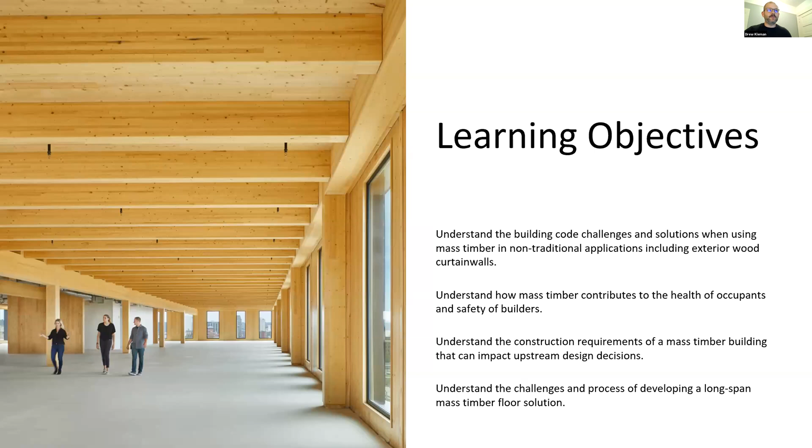So we split the presentation into 3 categories about the Catalyst project, hitting on design, construction, and product. Again, keying back to those learning objectives, learning about the mass timber project, and I think setting the stage for design is important here on this project, but also getting that feedback from the construction team, and then some insight into a company in developing a product through innovative mass timber solutions. So I think the important thing here is the perspective that we as an integrated team can bring here.

So for the design portion of the presentation, I'm going to briefly discuss the project goals and some metrics just to kind of give a frame of reference to the project. So early on, there were some key goals that drove the project's design and execution. These goals were highly embraced by the client and the design team. So first and foremost, utilizing mass timber to support offsite manufacturing and fabrication. And this really helped lead us to innovative uses of mass timber, which we'll discuss later in the presentation. One of those innovations is the long span mass timber floor solution that Hans Erik will be talking about.

That innovation precludes the need for concrete in order to get a long span solution in mass timber, the first of our knowledge of that type in North America. The net zero energy and net zero carbon target goals also led to innovative uses of mass timber solutions, specifically with the exterior wall assembly.

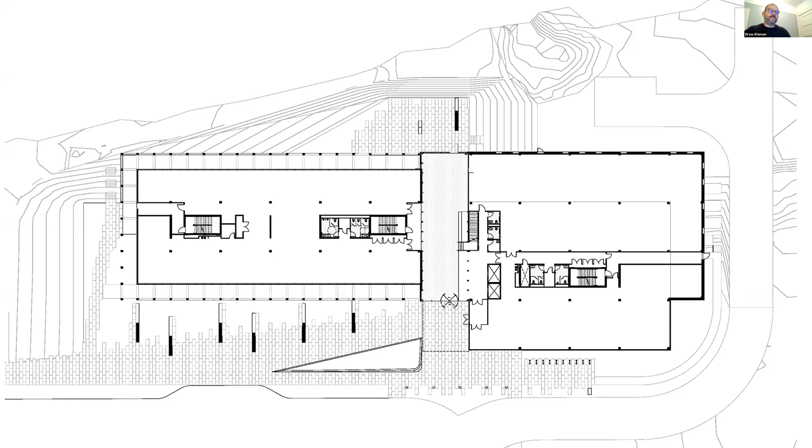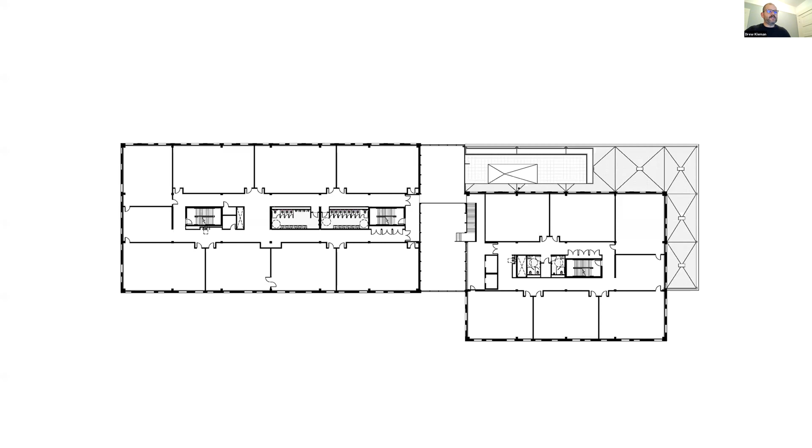The upper floors are more reflective of the rigor within the structural system and the program organization. So here the second floor is partially carved out to provide a two-story lobby. The building is organized on a 30 by 30 mass timber grid, like I had said previously. This breaks down into 10-foot by 30-foot nominal sections, which then inform the overall CLT floor components, as well as the wall modules.

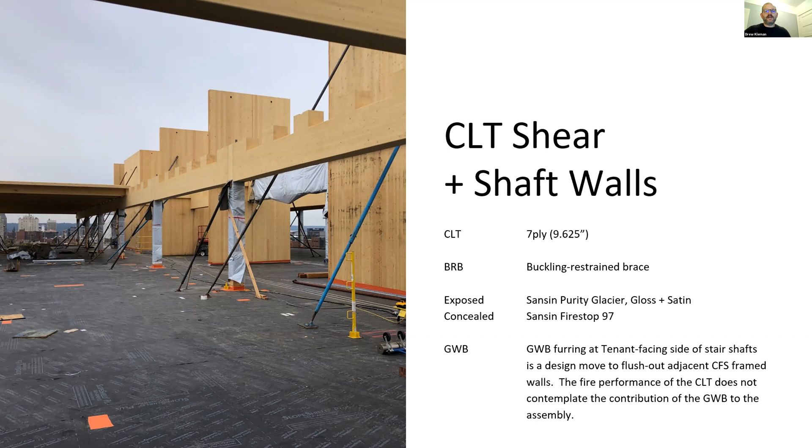I'll be talking about the two components here, the shear and shaft walls, as well as the exterior walls. We had 7-ply CLT shear and shaft walls, just shy of 10 inches thick. From a lateral perspective, they use buckling-restrained braces at the bottom of the panels to dissipate that energy. There's a couple of different finishes that were used for exposed and concealed spaces. And in some of the images, you may see that there's some gypboard furring around some of the stair shafts. Those are actually used as a design move to flush out adjacent CFS framed walls. That gypboard actually doesn't attribute itself to the fire performance of the walls.

A few code challenges here. CLT is allowed as a material in Type 4HT buildings, but is not necessarily listed prescriptively or addressed in the building code as a shear component. So we worked closely with our engineering team, as well as our code consultant team, to provide some engineering judgments that address the specific CLT shear and core wall conditions.

A lot of our design drivers were around a shear wall free perimeter. We really wanted to prioritize transparency and also thought about decoupling prefabricated systems. Each component of the CLT lateral system are known components, but they may not have been used together before, so we were looking to use off-the-shelf components in innovative ways.

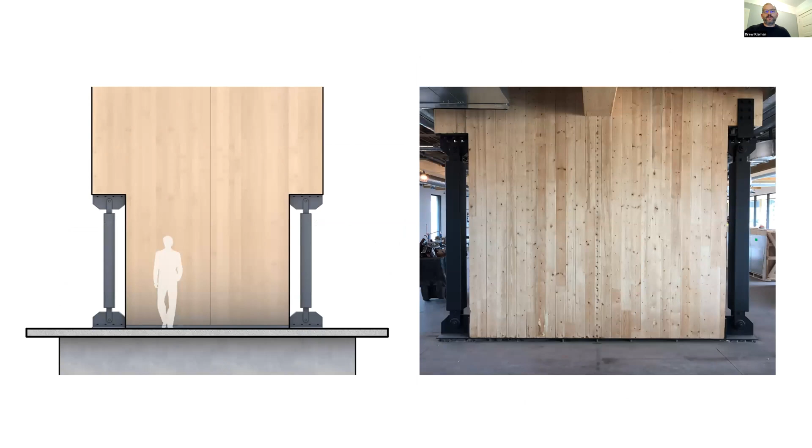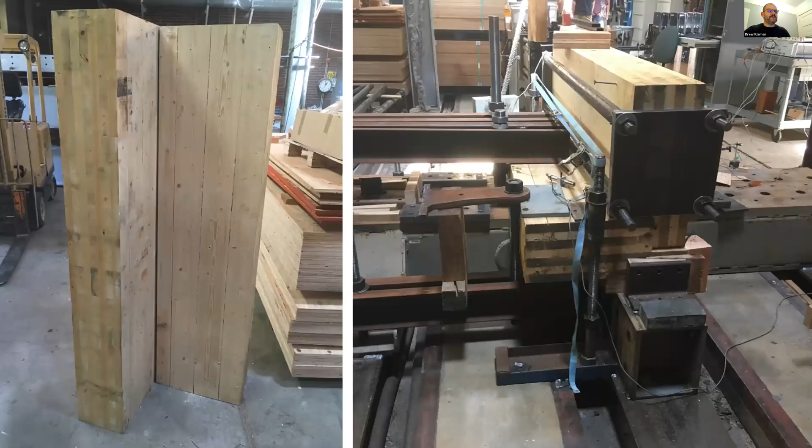This is a rendering on the left and an image on the right of the bottom of the CLT walls, where the BRBs are connected to the CLT and then to the mat concrete foundation. The walls stand approximately 70 feet tall, and they're spliced in the middle about level 3.

There's a horizontal joint where epoxy dowels are used to connect them. Through the process, we needed to test the walls. There's known data on CLT performance itself, but we needed to test the actual corner conditions framing the stairs. This testing was completed down at OSU in conjunction with our engineer KPFF.

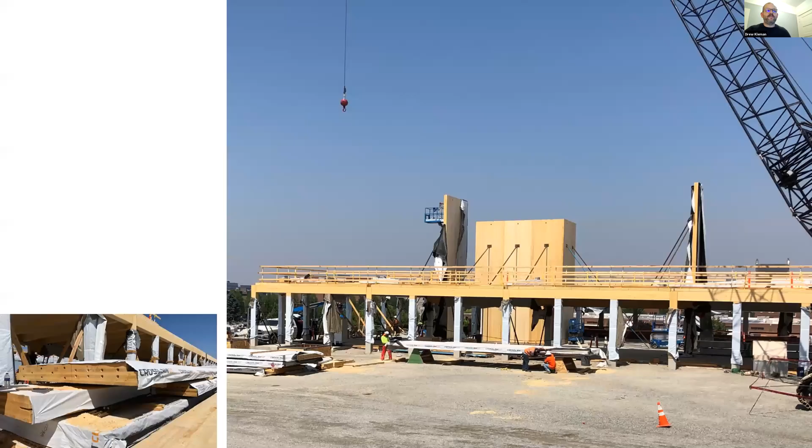There were some really great, interesting images as the CLT is going in with the shear walls being erected. From a sequencing standpoint, there's a lot of impact downstream to the construction teams that we've heard would help inform design decisions upstream. The image on the left shows some of the pre-drilled holes to receive the epoxy dowels.

A sheet-applied WRB, a combination of insulated metal panel as well as mineral wool insulation, and then the rain screen cladding is terracotta.

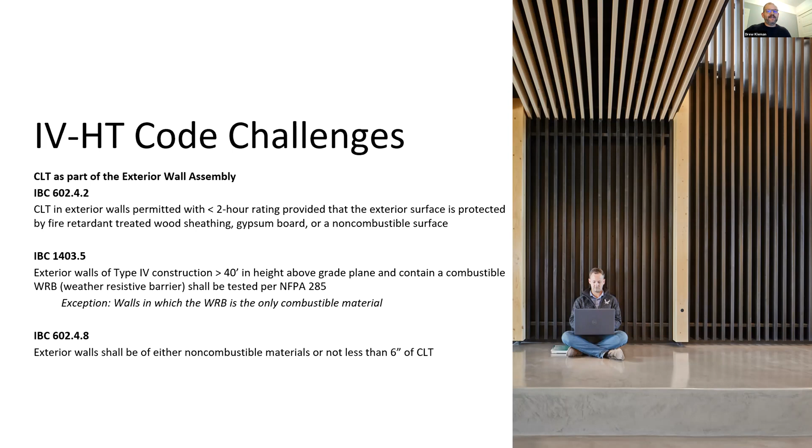Additionally, when we look at the requirement under Chapter 14 for exterior walls in Type 4 construction greater than 40 feet in height, NFPA 285 comes into place. There's an exception that applies to walls in which the WRB is the only combustible material—CLT would be fine—but here we have the WRB and the CLT, which are both combustible.

So what we did to address that is work directly with the city of Spokane to walk them through the design process, address their concerns early, and then work with our code consultant to draft the AMMR—the alternate means and methods request—and the engineering judgments to address them.

Essentially, the point with the exterior wall is to not require testing such that the WRB does not increase the vertical and lateral fire spread of the assembly, due to its low flame spread index. Because this is a curtain wall system, there's movement we need to accommodate, so those joints in the vertical and horizontal orientation of the panels came into play as we looked at how to address them.

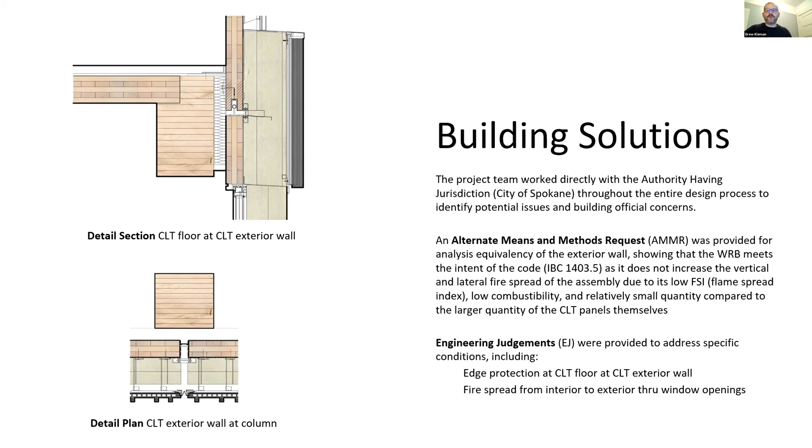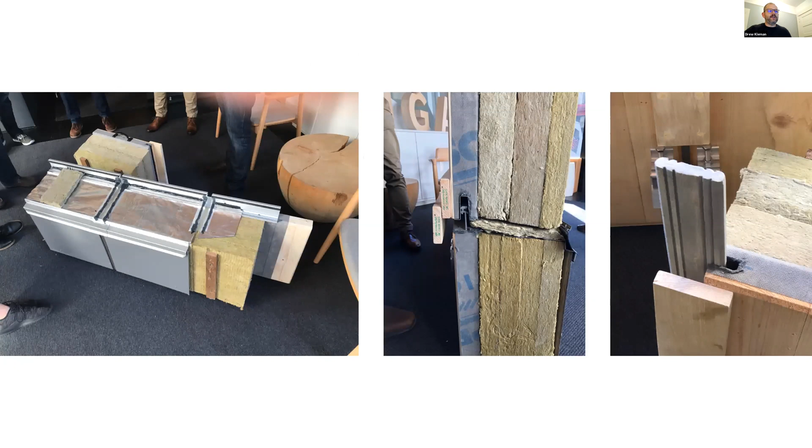The system did require a considerable amount of time and effort beyond just engineering and design evaluation. There were multiple scale mock-ups to test the concept for constructability issues, and ultimately to gather data on what we're calling an extrusion system where the panels came together. This is an example of that extrusion.

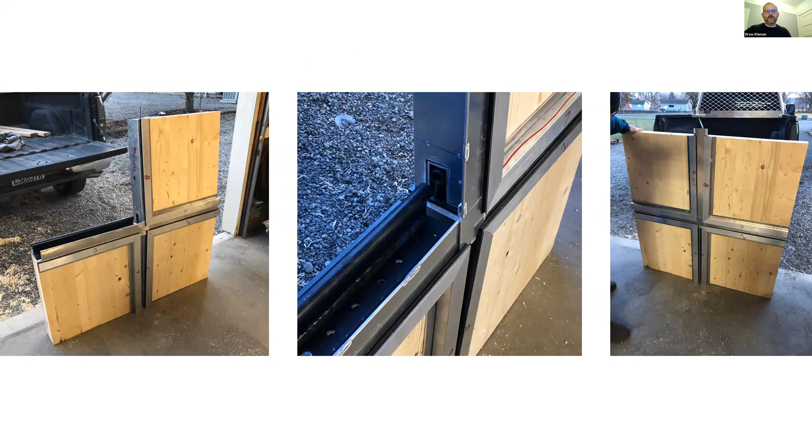What actually came out of that was it wasn't very cost effective. So we worked with our construction teams and suppliers to identify a more off-the-shelf system that VaproShield was able to quickly take a look at with a silicone strip and provide a solution that worked well.

Part of our documentation included fabrication-level drawings, which identified each layer of the wall assembly, like I talked about earlier, in a series of drawings for each of what we're calling mega panel types. These are effectively 10-foot wide, 30-foot nominal panels.

The intent was to prefab the entire panel, but the terracotta logistics proved a bit too steep for our teams to achieve that. Given the schedule conflicts, we needed an alternate solution: partial prefabrication, including factory application of the WRB, pre-flashed window openings, and the insulated metal panel and rail system.

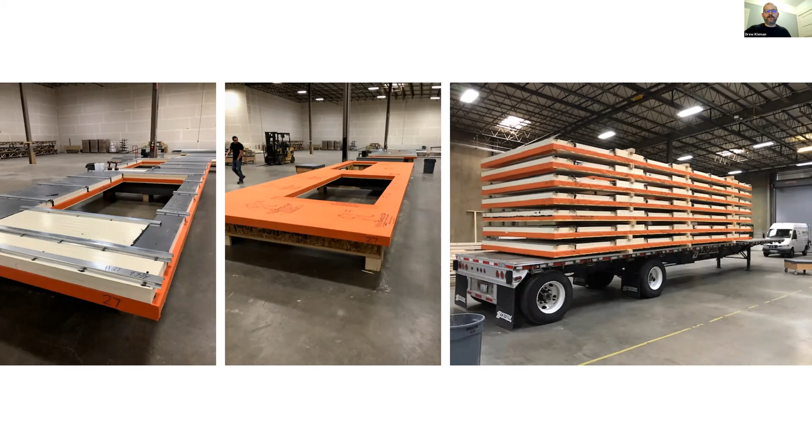A quick brief on the challenges. As a one-of-a-kind, first-of-its-kind system, there were a lot of hurdles to climb over, from the onset of the concept through final detailing and installation. The finite engineering of the panels proved difficult—as a 2-story curtain wall panel, it needs to accommodate movement across those two floors, which increased the vertical and horizontal joint sizes. Reconciling the design vision with constructability was another challenge, but working with Cora and her team, we were able to install a really beautiful system.

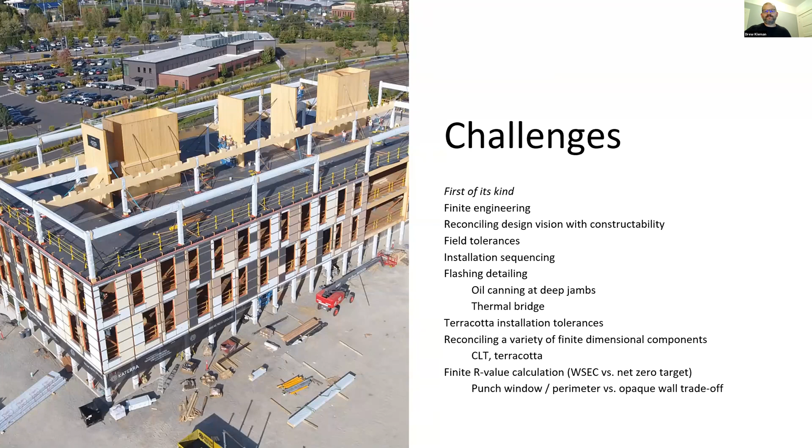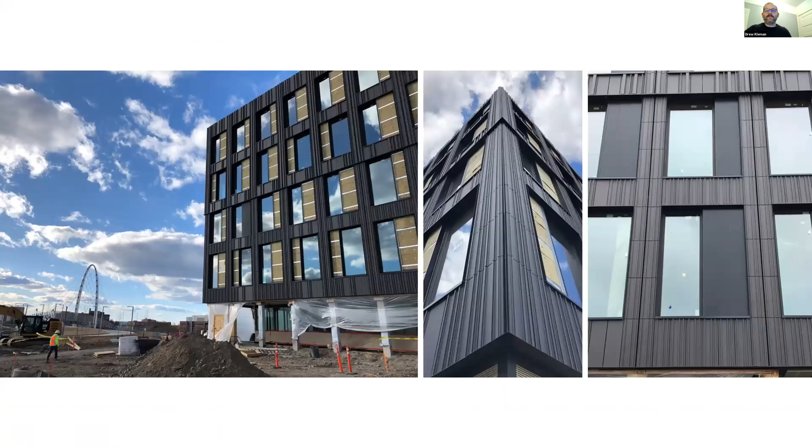A few additional install images here, working from left to right. After the prefabricated panels were installed, terracotta was placed, followed by the flashing, final trim, and then the metal panel.

Some key outcomes of the exterior walls, from a design perspective: increasing daylight penetration into the building core, which helps reduce lighting loads and power density, and mechanical system benefits through a highly insulated wall assembly—reduced energy needs and costs, reduced upfront equipment capacity and size, and reduction in acoustic levels.

The CLT opaque wall portion averaged just shy of an R36. There were some wonderful QC protocols put in place for this building that allowed us to get an air leakage rate well below code—the lowest air leakage rate our consultant had ever tested.

With the use of 3-ply in the exterior wall, a lot of CLT was used and a lot of carbon was sequestered, but also the improved occupant working and learning environment is obviously very important here.

So I'm going to take a quick pause here and move to a video, and hopefully we get the audio to work.

Hi, I'm Cora Todd, Project Manager for Katerra Construction, and this is the South Landing Catalyst Building. I'm excited to take you for a tour—let's go take a look.

The Catalyst Building at South Landing is 160,000 square feet of Type 4 heavy timber construction. We use glulam beams out of Canada, and three different sizes of CLT in this structure. The 7-ply shear walls are by Structurlam, the 3-ply exterior walls are also by Structurlam, and the 5-ply floor panels—both flat panel and built-up double T panels—are from right here in the Spokane Valley, out of our Katerra CLT factory.

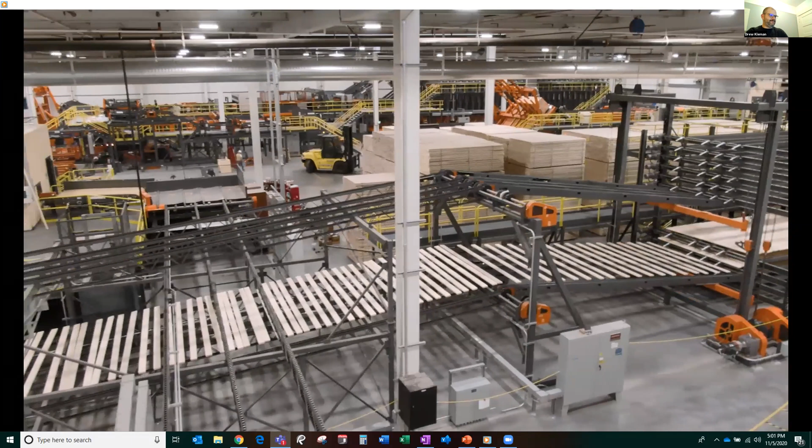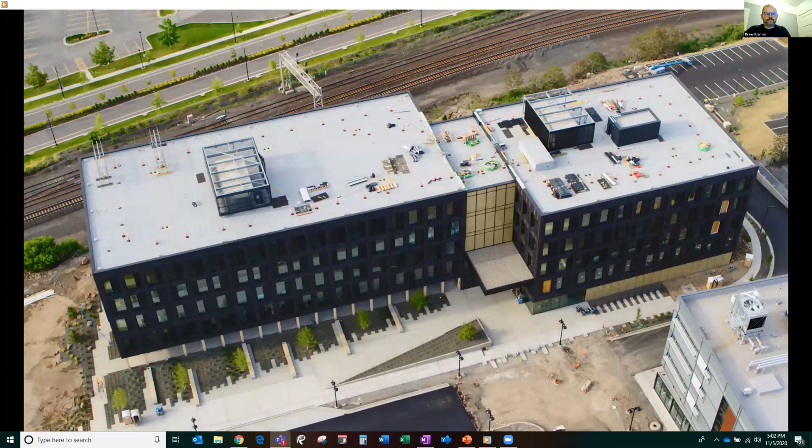It aims to be one of the largest zero energy and zero carbon buildings in North America, and will pursue zero energy certification by the International Living Future Institute. The 5-story office building is the result of a cross-industry team of partners, including utility provider Avista, design-build engineering firm McKinstry, and Katerra, working with Katerra design partner Michael Green Architecture as the design architect. Katerra is the architect of record and general contractor for the building.

The building makes extensive use of CLT in design and structural elements, including floors, shear walls, and building envelope, which enables near passive house levels of thermal performance. So let's start by looking at the 7-ply panels from Structurlam.

7-ply shear wall elements were erected in 2 lifts using a spliced epoxy rod system, which allowed for ease of erection and constructability. We were able to gain quite a bit of schedule using this system, even having to do a half-lap joint in the middle to span the lengths that we needed. You can see here where these 2 panels splice together and the screws tie them to each other.

Katerra needed to use 7- and 3-ply panels from Structurlam because at the start of construction, when we needed to start producing materials, Katerra was only certified to produce 5-ply panels. We have since received our certification to produce 3-ply panels and are currently in process for getting certification for both 7- and 9-ply panels.

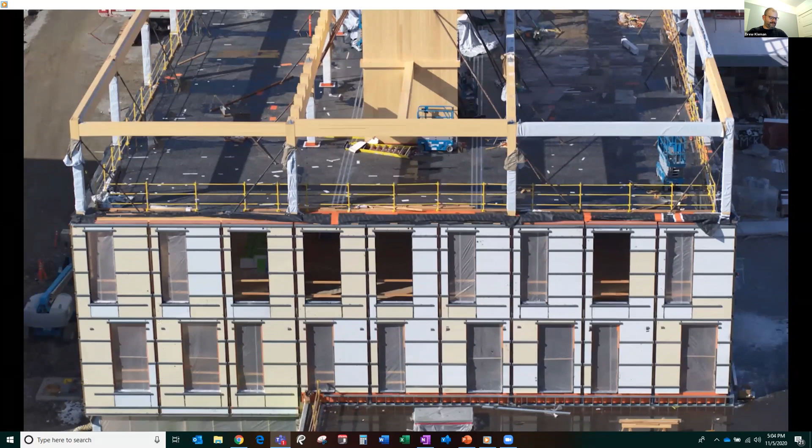The 3-ply panels came to us with window cutouts already present. We then installed punched window openings, which are triple pane units from Euroline windows in Canada, and the exterior envelope has an R40 average because of the minimal thermal bridging as a result of the CLT.

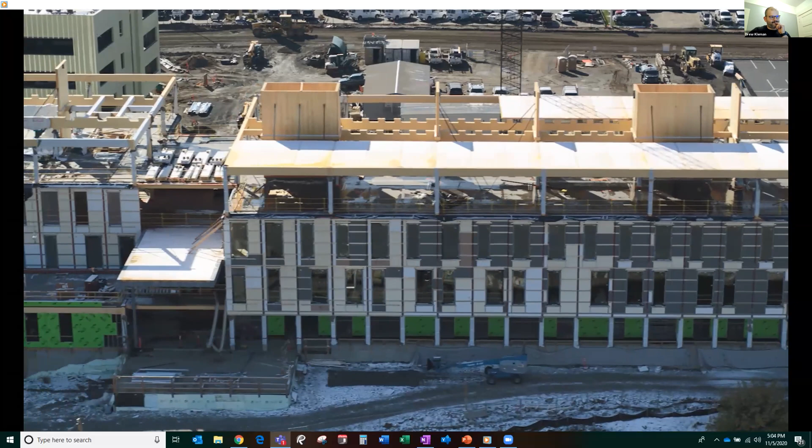The use of CLT in exterior walls of Type 4 heavy timber buildings is allowed. Katerra worked diligently with our code consultant and the City of Spokane to ensure all fire life safety measures were addressed with regard to flame spread.

The floor line fire stop assembly is typical as found in aluminum curtain wall to concrete deck buildings. What we can still see, because TI renovations have not begun on this floor, is the gravity connection steel plate connecting the CLT 5-ply to the perimeter glulam beam beneath this gypcrete.

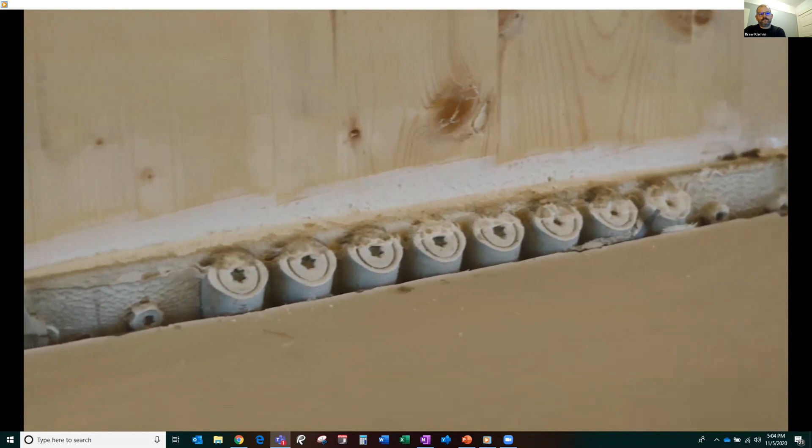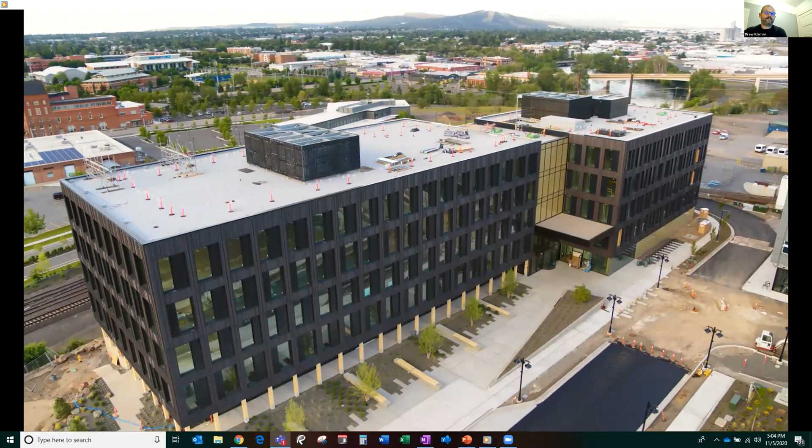The primary tenant for the building is Eastern Washington University. They occupy approximately 60% of the building. EWU is relocating some of their technical programs to this building, including computer science and electrical engineering, ideal programs to be located in this type of structure.

The grid was set up on a 30 by 30 spacing, which, while not completely efficient for CLT, we were able to manage well by using ribbed panels, essentially a double T made from wood fiber instead of concrete. To our knowledge, this is the first application of this technology in the US.

The Catalyst building utilizes the very first product off our factory floor. Not a single panel was sent back. We are 100% on quality for our first project. Every piece of wood that you see in here is an SPF, or spruce pine fir mixture.

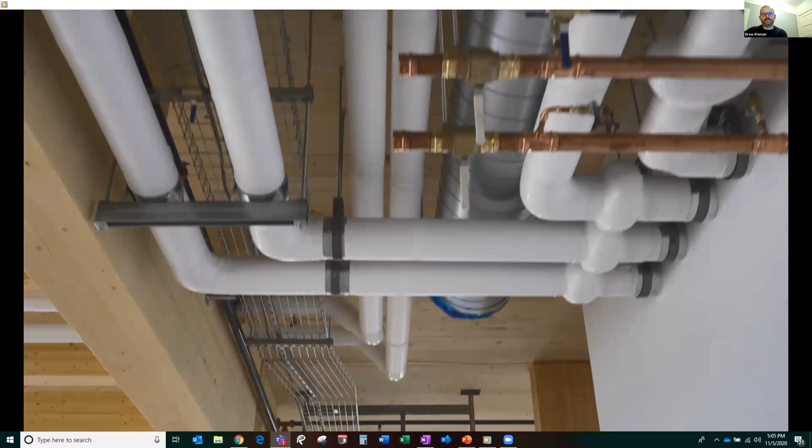We upsized the glulam beam in the center bays to allow for flat panels instead of the built-up double Ts. Upsizing the center beam allowed for running of mechanical systems through these center bays and then out into the outer bays via the castellated beams that you see here.

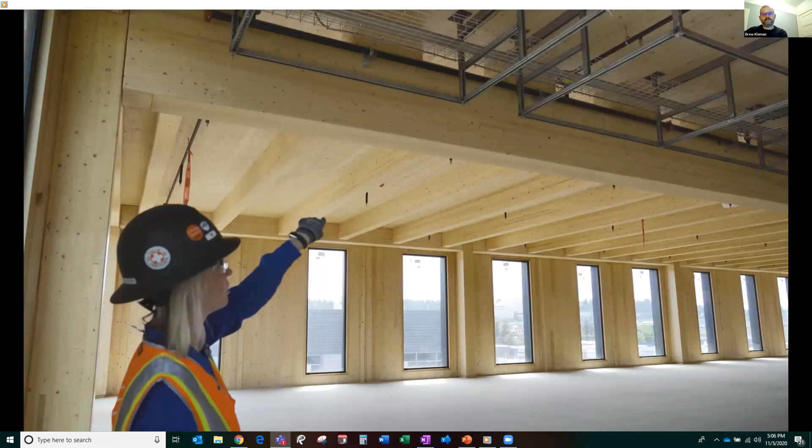Low air leakage equates to very high performance. It's the metric that tells you how the building will perform and whether it reaches the very minimal energy allowance of a passive house building. Passive house needs to have uncontrolled leakage through gaps less than 0.6 of the total house volume per hour during a pressure test at 50 Pascal, both pressurized and depressurized.

The Catalyst building measured an air leakage rate of 0.035 CFM per square foot, which is significantly below the code requirement. The results demonstrate the great workmanship and management by the Katerra construction team and rigorous detailing by the design team. Air tightness is difficult to achieve in a building of this size.

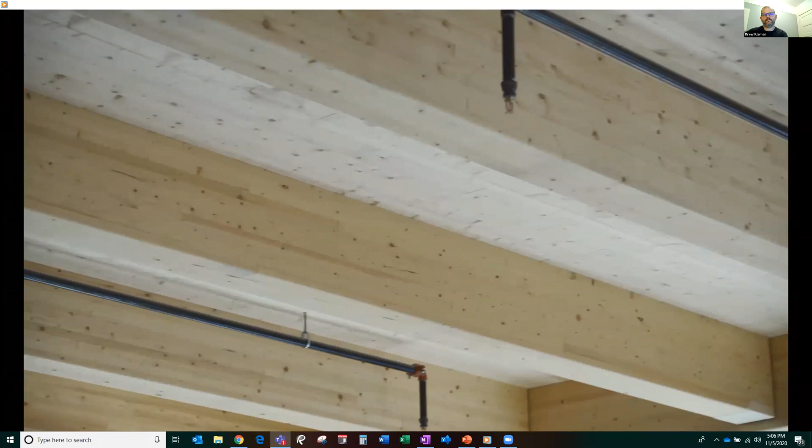Air tightness tests were done by RDH, one of the leading envelope design firms in North America. They have done over 100 similar tests, and the Catalyst building performed better than any building they have ever tested.

On top of our CLT panels, the floors have a 3/4 inch Acoustomat and 2 1/4 inches of gypcrete on top of that. This was done in order to minimize vibration from pedestrians and people walking through the structure.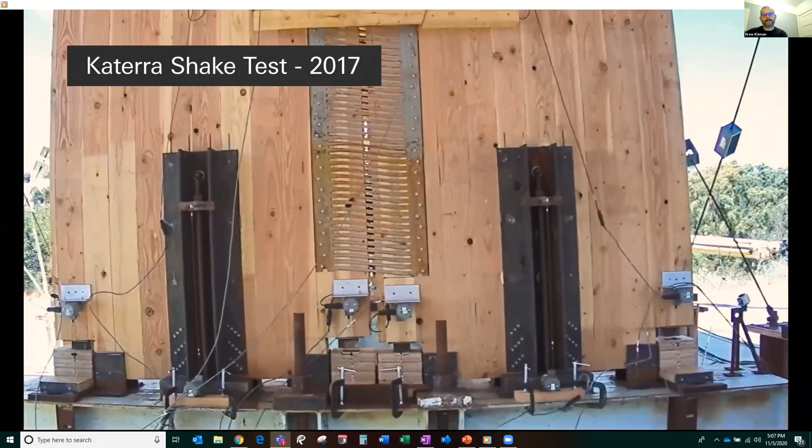Panel to panel spacing, behind this piece of trim, we still have about a 2.5 inch gap, which allows for interstory movement of up to 3/4 of an inch per panel. So in case of an earthquake, these panels would shift independently and not conflict with each other.

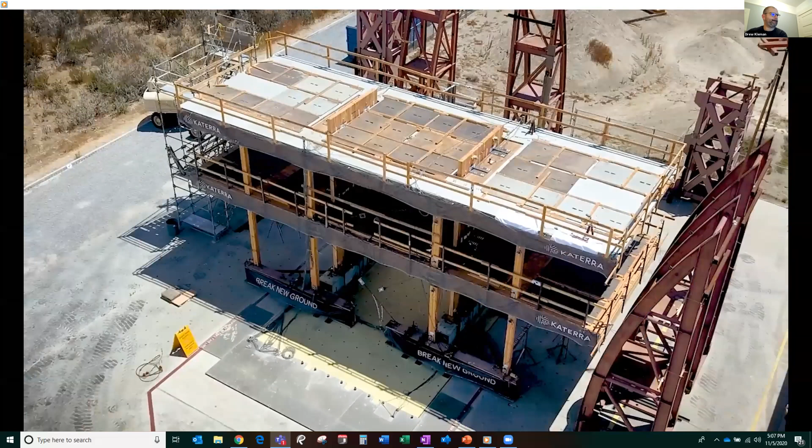One of the structural elements in this building is called a BRB, a buckling restrained brace. There are 22 of these at our shear cores.

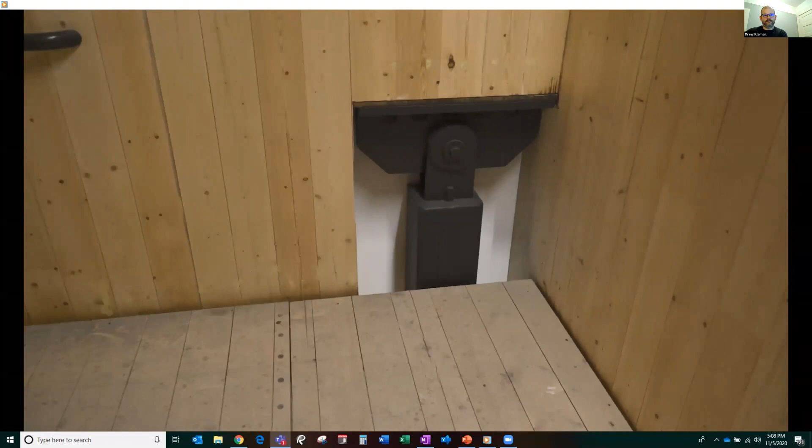These are concrete-filled steel tubes with steel plates running through that act as a stabilizing tool. If this building were to start rocking in an earthquake, they take the forces from the diaphragm above and drive them into the very large concrete pads underneath this stair core. That happens at all 3 of our stair cores and at the knife walls in between throughout the structure.

We omitted a beam at the center bay to eliminate rib panels within the center zones, allowing for main distribution around the core above the corridor, then feeding branch ductwork through cutouts in the main glulam girders. The CLT within the core is an efficient span of 15 feet. The omitted beams allow utilities like ductwork to be installed tighter to the underside of the CLT.

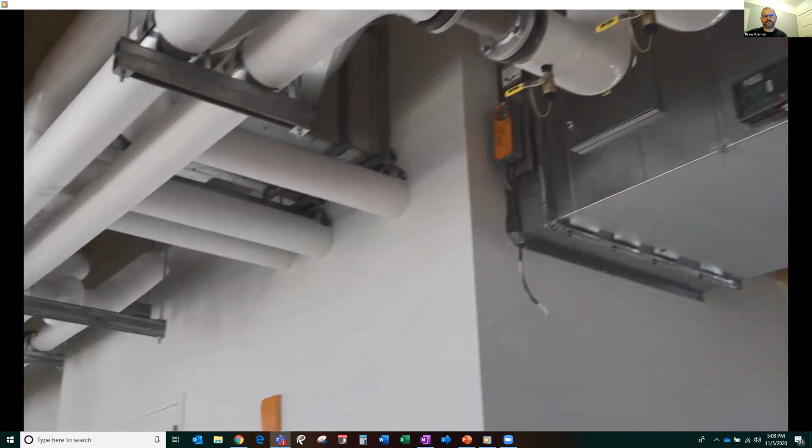An environmentally conscious choice in this structure included capturing waste that could have gone through the chipper and utilizing it for other parts and pieces in our building. This included getting the window cutouts that came from our 3-ply panels and utilizing them for stair treads, risers, and landings in these stair cores. The finished surface in this area is going to be a rubber tread and riser, but the underside of the CLT is all going to stay exposed.

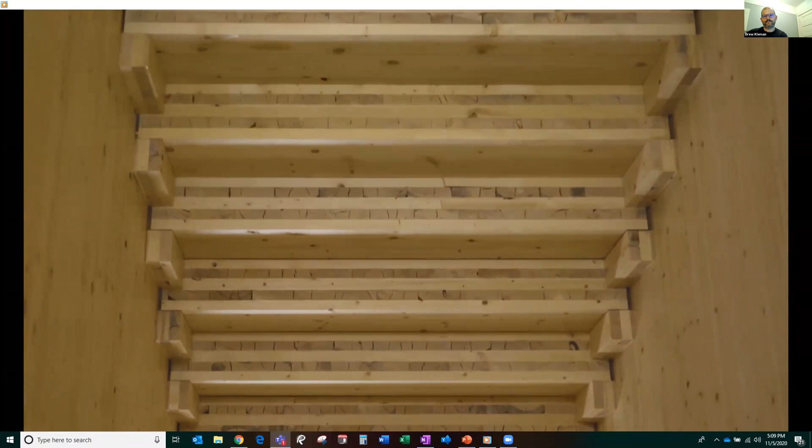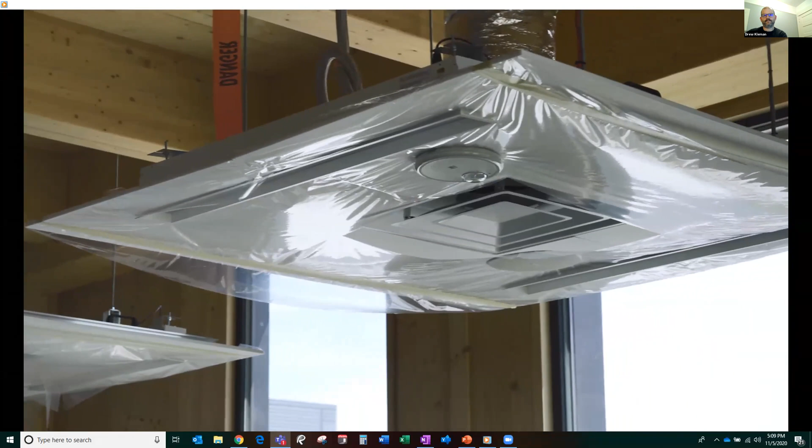This is an example of part of the tenant build-out that Eastern Washington University has done in the Catalyst building. This is a VDC classroom, and it showcases the cloud system by Overcast Innovations, installed by McKinstry. The goal was to maintain open space while distributing electrical, mechanical, and fire alarm systems throughout the space.

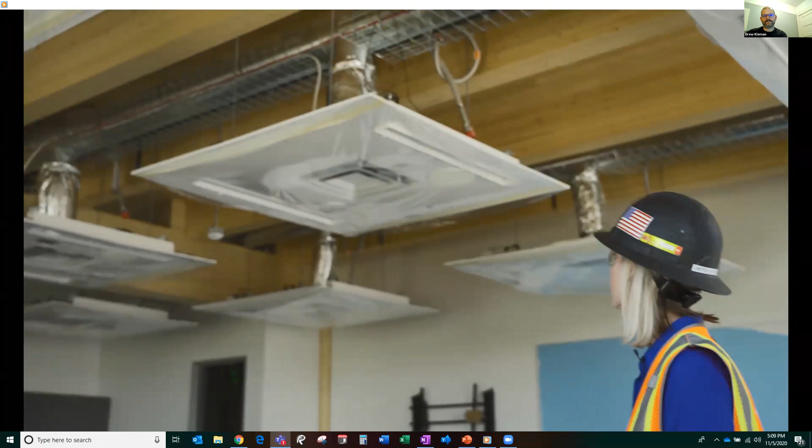Commercial buildings are not required by code to provide for perimeter power. Katerra Design worked closely with McKinstry to develop strategies for routing conduit across the ceiling, through perimeter beams, and down the exterior wall in discrete locations when necessitated by future tenant fit-outs. Most office systems and layouts are serviced by floor boxes or through adjacent framed walls, which omits the need for such perimeter power and data.

In this main lobby between East Tower and West Tower, Katerra and Michael Green Architecture really wanted to emphasize vertical wood elements as well as CLT panels that extend past the perimeter of the building via our cantilevered awnings.

While the majority of this building is made out of wood, in this two-story lobby we did have to use steel elements. That steel, because it's exposed, needed to also have an intumescent coating applied before we put the finished paint on it. Now the floor panels of level 3 create this lobby space, and Katerra thin 3-ply panels are used as a veneer to span between rib beams.

When we put 3-ply panels from beam to beam, we created a concealed space. Because of that, Katerra had to use a fire-resistant coating since that area is not sprinklered.

Katerra commissioned the Carbon Leadership Forum and Center for International Trade in Forest Products at the University of Washington to analyze the environmental impacts of our CLT as well as the Catalyst building in Spokane. These two organizations are the preeminent leaders in their respective fields. CLF recently released an embodied carbon calculator for the construction industry, and CINTRAFOR is well known for its research to support sustainable forestry and forest products trade.

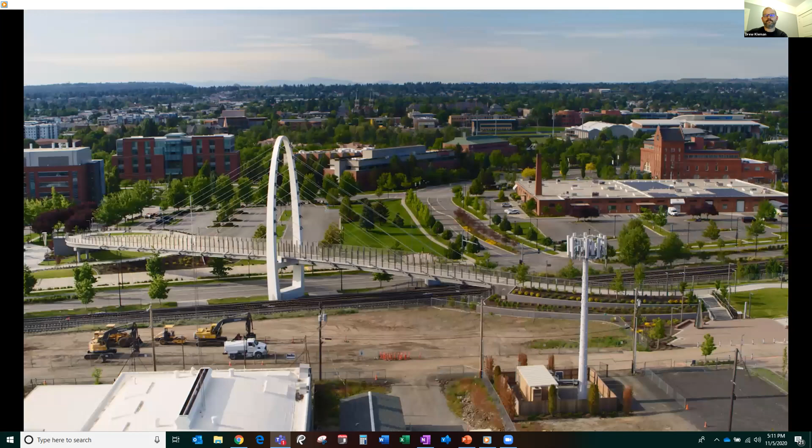Our goal in pursuing this analysis was twofold: to better identify opportunities to reduce environmental impacts in our supply chain and improve CLT production efficiencies, and to evaluate the life cycle environmental impacts of mass timber at the whole building scale, identifying opportunities to optimize the environmental performance of mid-rise mass timber structures.

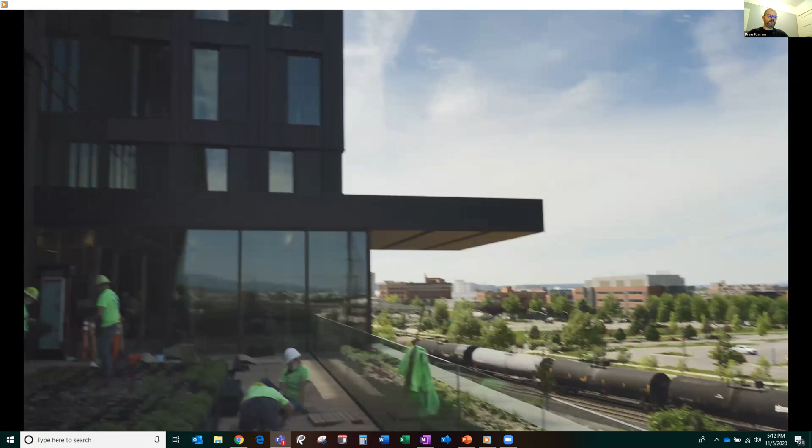The Carbon Leadership Forum found that mass timber nearly offsets all upfront embodied carbon in the Catalyst building. The life cycle assessment of the Catalyst building structure and envelope estimated the upfront embodied carbon of the building to be only 207 kilograms of carbon emission per square meter. Considering the Catalyst building stores approximately 204 kilograms of carbon per square meter of biogenic carbon, the CLT and glulam elements offset its upfront embodied carbon.

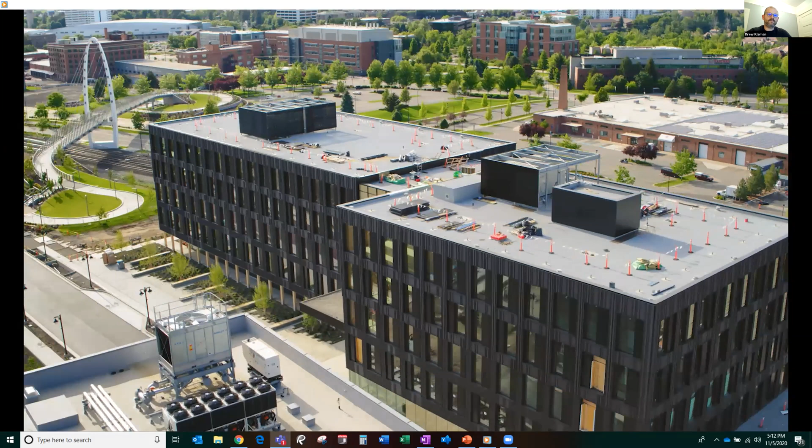While the study did not make direct comparison of the Catalyst building to similarly sized buildings constructed out of steel or concrete, its upfront embodied carbon impact is significantly lower than that of other North American commercial office buildings in the embodied carbon benchmark study.

I think that was important when applying quite so much hard surface in this main, very tall lobby area — we had to use quite a lot of sound insulation board behind all of the horizontal and vertical panels to make sure that while this was an open space, it's not a loud space.

So now we're out on the north patio in order to show you first how our Katerra CLT panels look in the cantilevered awning, but also to show the Alaskan yellow cedar siding showcased on the north and east elevations.

So here we are on the level 2, soon to be occupied deck for the Catalyst building, in order to show you the terracotta rain screen system by Shildan that we ordered out of Germany. This system uses a vertical clip and rail system in order to take these approximately 3 feet by 1 foot panels and hold them in place.

Wonderful, thank you, Kora. And with that, actually, I'm going to hand it over to Kora to get some additional construction feedback.

Thanks, Drew. So I'm hoping I'm not going to be repetitive in some of these things that I'm going to talk about. The Catalyst building wasn't just a first for Katerra, it was a first for me. It was a first timber structure for me.

What we found is that some of the safety benefits we were able to design and construct into this building were that the more we unitized, the more we panelized, the more we were able to build complete items into the structure, the shorter duration we needed to erect this building. Those rib panels were an excellent way that we were able to do that. As we did that, that also reduced our time on site for the most part, and got us to the next trades quicker.

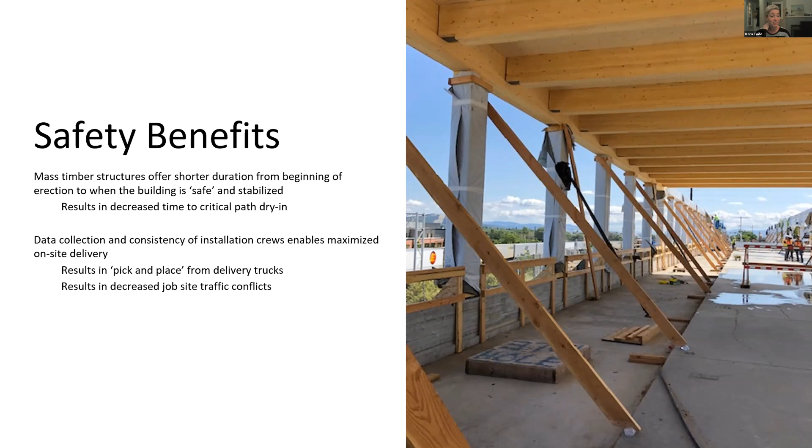So I can appreciate that. Next slide, Drew. Let's see.

So more safety benefits. The less time I have to spend on site, the safer everybody is, because there's less exposure to risk. The rib panels and flat panels, just the structure of the building itself allow for that.

Because if we compare it to steel, right? In steel, okay, let's put the concrete down, that's the same. Put the steel up, that's similar to glue-lam columns and beams. But then on steel, I have to come back and weld down metal deck, then come back and put down rebar, then come back and put down the concrete topping on top. And then the structure is safe for the most part in regards to an erection engineering perspective. With CLT, what's important is we eliminate a couple of the 'let's come back and make sure this is secure' steps. Obviously we still have our temporary erection protection, but we've eliminated the need to come back and weld on a deck because we already have our floor panels in place and the structure is secure that way, as far as during construction activities.

Another important but not often talked about safety factor for people on site is that CLT buildings, as they're going up, tend to be less noisy. Noise pollution is an issue since some tough guys don't want to wear ear protection. If my building sites continue to be mass timber, they're protected inherently because we have less equipment on site.

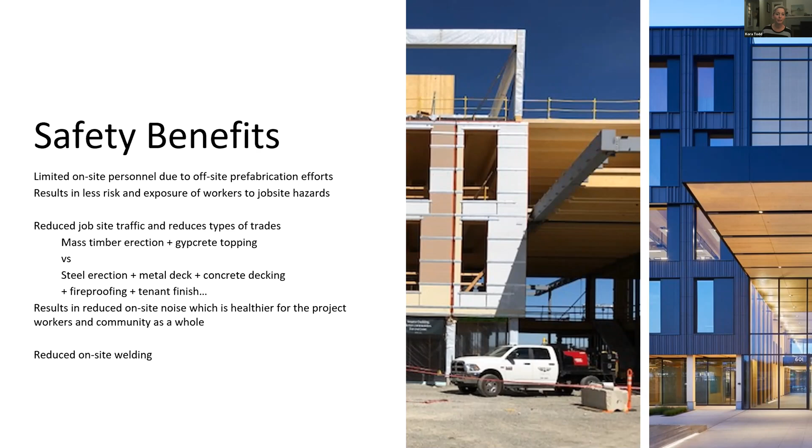But next slide. Thank you.

So the feedback loop that I've been thinking about for the past couple of weeks, if I were to relay information from a construction perspective to design team personnel, from the ground up, if we did it again, what would we learn? What helps is...

Timber is unique, but it's also not unique. We've got a really good, robust group of manufacturers that can supply product. Katerra happens to be one of those. But what helps us is identifying, okay, this is what the structure needs to be, this is what our design values are.

It's as simple as listing three options that are local. If it was a paint spec, you would list Sherwin-Williams and whoever, right? So with Glulam and CLT, here's our providers, and it's not just Structurlam, it's not just Katerra. Katerra, Structurlam, Nordic, or whoever it is, give construction the opportunity to maximize relationships, and also the flexibility to say, okay, Structurlam's panels are a little different than Katerra's, and Katerra's are a little different this way. So is Katerra's product going to work better? Being willing to have the conversation was really important.

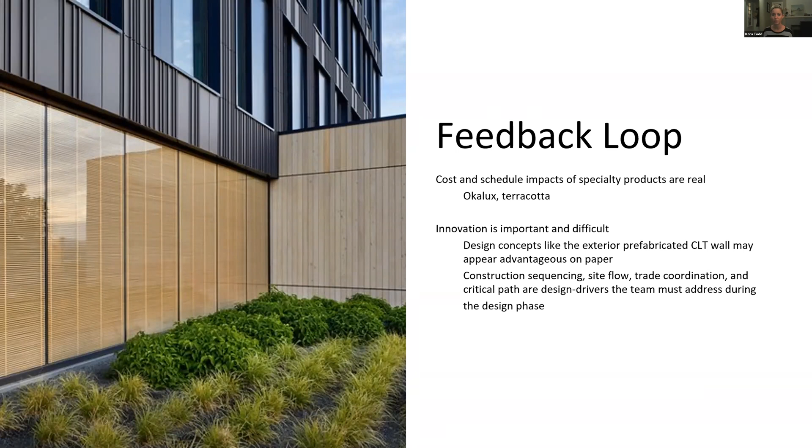I'm supposed to speed up a little bit. Innovation - I think I probably just captured that. It was difficult, but it was really important, and I was really thankful that we were able to do it.

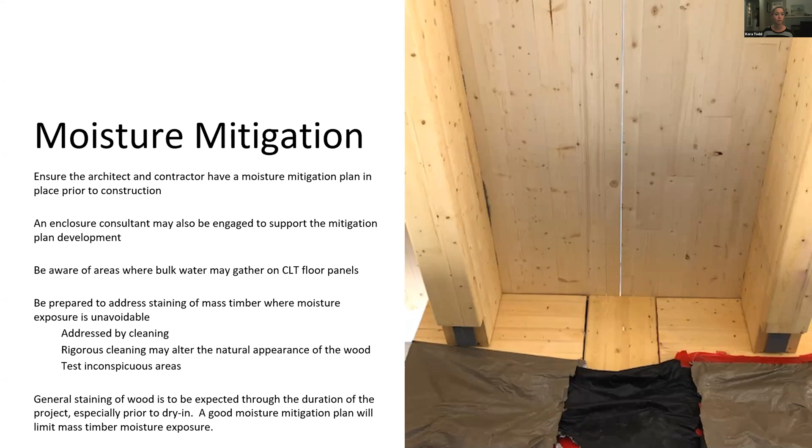Moisture mitigation - mostly during construction we just pay attention to it. It's going to happen, it's going to stay in the wood. We need to make sure construction has a plan in place to protect the wood as much as we can, and then mitigate from there. Sometimes that means washing, sometimes sanding, sometimes well, we did our best. But the factory builds in tolerances, and thankfully the wood stabilizes from there.

I kind of already talked about erection engineering, but these pictures specifically show what dirty steel does to finished product. That's something to keep in mind when designing these types of buildings, and when erecting them - it's a finished product that we're putting up. It's like putting up painted walls.

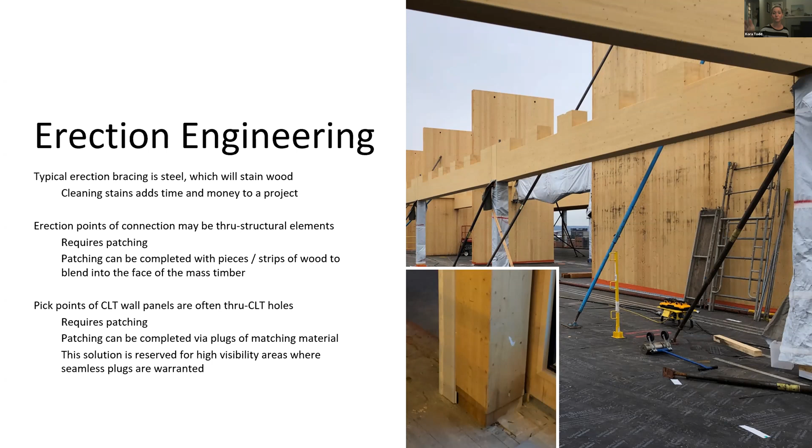So let's be mindful. I cringe every time I see this picture because I see all that dirty scaffolding resting up against my walls. It's like, well, now what am I going to do? I'm going to have to sand, I'm going to have to wash, get that fresh, because that is going to be an exposed product.

Material tolerances - concrete is different than steel, different than CLT. We design to a 2 millimeter tolerance, I want to say, and that's not what we build concrete and steel to. So we had some issues with that, and there was limited flexibility. We had to cut out and try again. But the mindfulness of tight tolerances above the concrete and less tolerances below the CLT is just something to be mindful of.

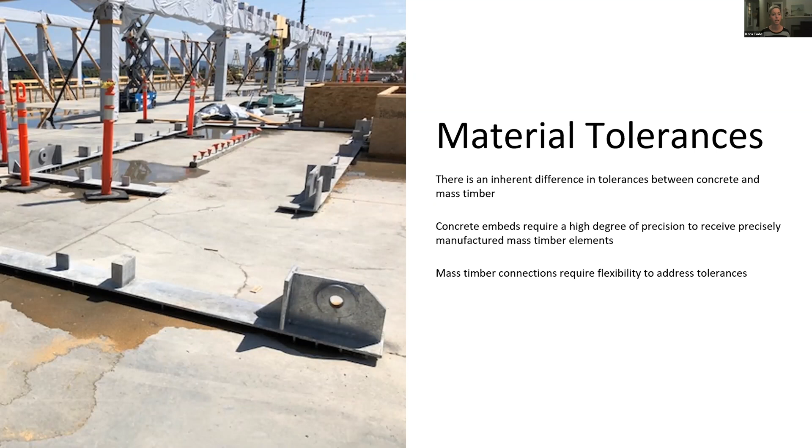These were little details that our ownership didn't actually end up liking. While it was really important to keep the wood up off the concrete and floors, because that edge can soak up moisture and cause staining, it also can collect dust, and they didn't like that. So we ended up discussing it ahead of time with ownership - what do we think about drilling into these details? Where someone might like it, our owner ended up wanting trim around it.

Fire stopping - Hans-Erik should talk about fire stopping, but as long as we get around the idea that it's not different than anything we've done, ultimately the building is made out of wood, and it will burn itself out before it will burn itself down. From there, Hilti helps us with the rest.

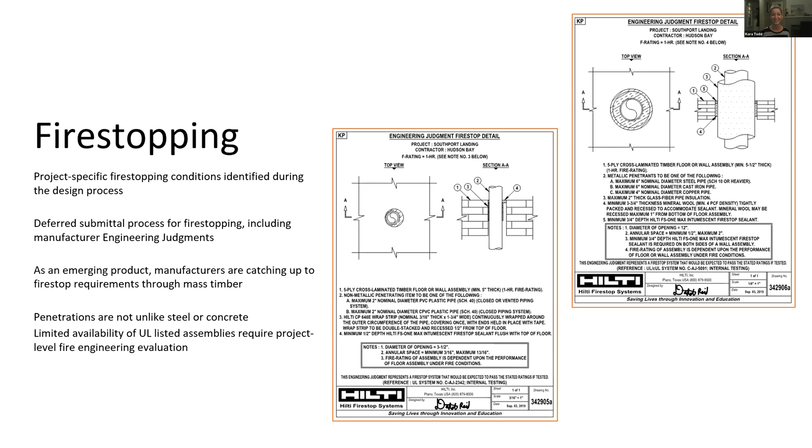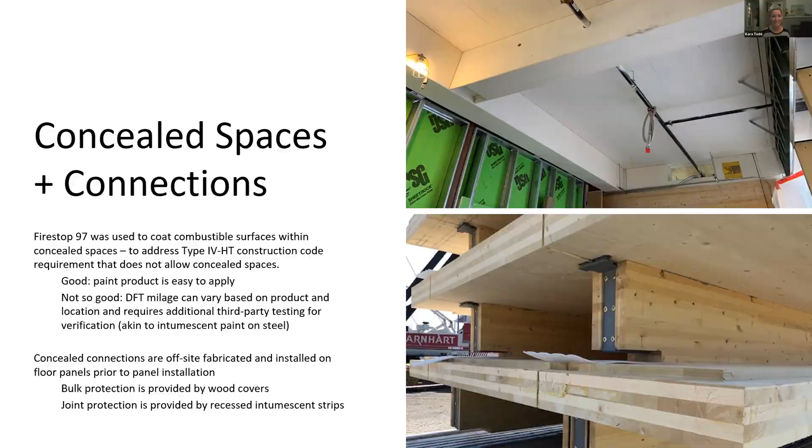Yes, excellent. I'm happy to jump in here. We've been looking at the building and talking about CLT, but what is it at the product level is my goal here. I'll run through these slides.

A key point is every manufacturer usually makes their panels in a large format size. Ours is very large, 10 to 12 feet wide by up to 60 feet long, every press. It's laid up with the crosswise layup shown there, in 3 to 9 ply.

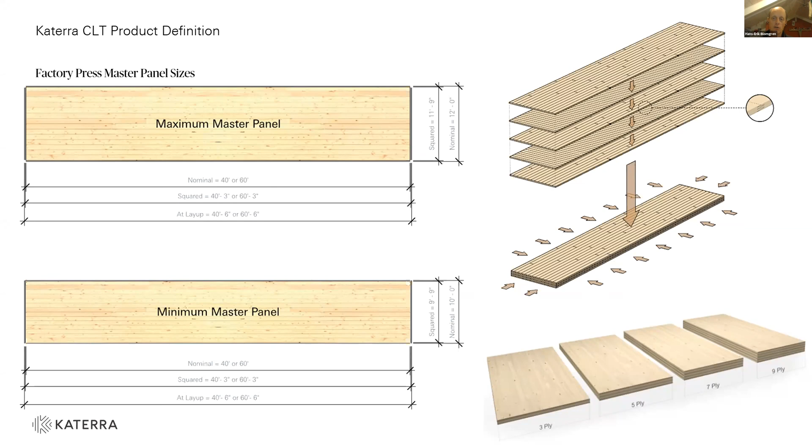The utilization of that panel in your module, with some discipline and design, to make sure you can use every part of the panel when possible, is a key design driver early on. That can be done through automated processes with CNC cutting. It's like steel shop drawings, but with wood shop drawings - every piece of wood has a mark and gets CNC cut.

And even routing out for some end connections, some routing out for mechanical, electrical, plumbing, and sleeving - these are all options.

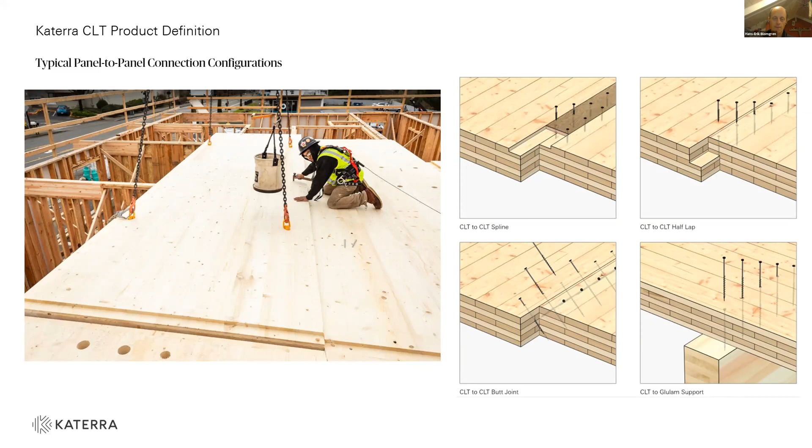What you get is a dimensionally stable and high tolerance product in the field that our builders, Cora and her team, have heard was true, and now they've seen it's true - just how these buildings self-erect. Chainsaws aren't allowed on site, right, Cora? So they don't have to go out there and trim it later. It self-levels, self-erects itself in that manner.

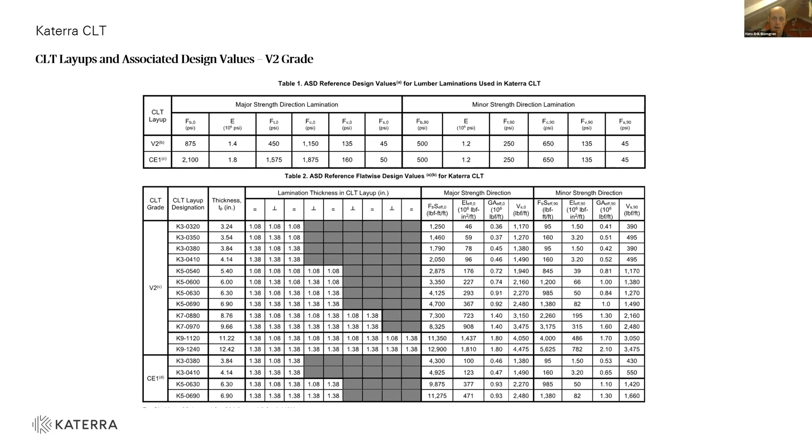I'll keep going so I don't get lost in that detail, but here the product literature is there too. The CLT website gets into the specifics on our certification and how to work with our material and third-party report.

On the rib panel assembly, that was a huge experience on my end to help see this through. We got a performance specification from the structural engineer of record, so Katerra engineered that rib panel as a product and worked through it.

My theme here, as you see the amount of effort we put into this product, it's all testing, testing, testing - data is gold. Engineers and architects want to see the performance metrics, because to span 30 feet with CLT gave us pause, and 30 feet is a key module here for education, if not office, to have that span. So we analyzed it and proved it out through testing.

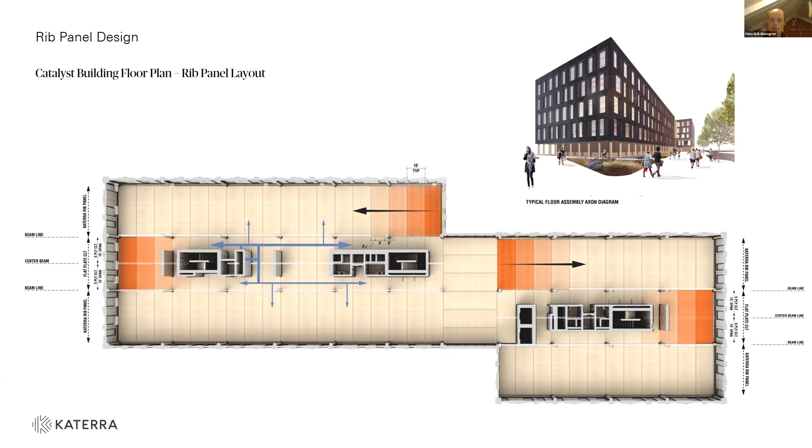Because we mechanically fasten the ribs to the underside of the CLT, 2 of them per 10-foot panel, we get composite action, so we get a very efficient cross-section, shallower beam depths, but still get the strength and stiffness we need for structural performance.

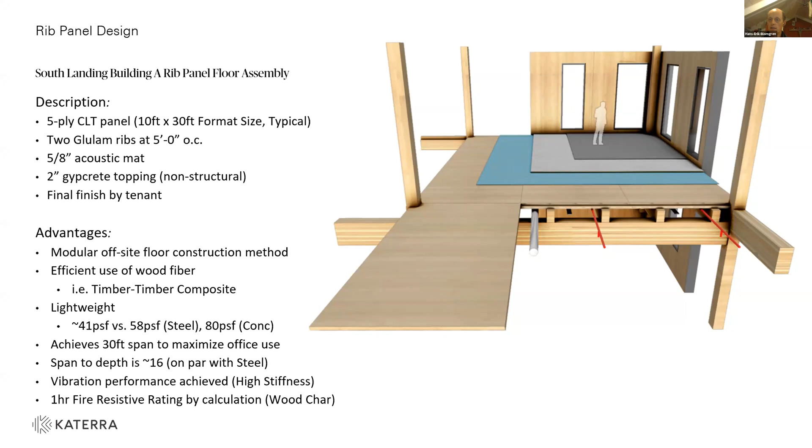I won't delve into this one much more - I did a structural engineering talk earlier today and had this slide in there. But we tested to meet the standard for pre-construction load tests in the code. We took a very literal view of the code, and the best way to get building official approval is if you have test data that shows it works. So we did that on the structural strength side of things, which was key.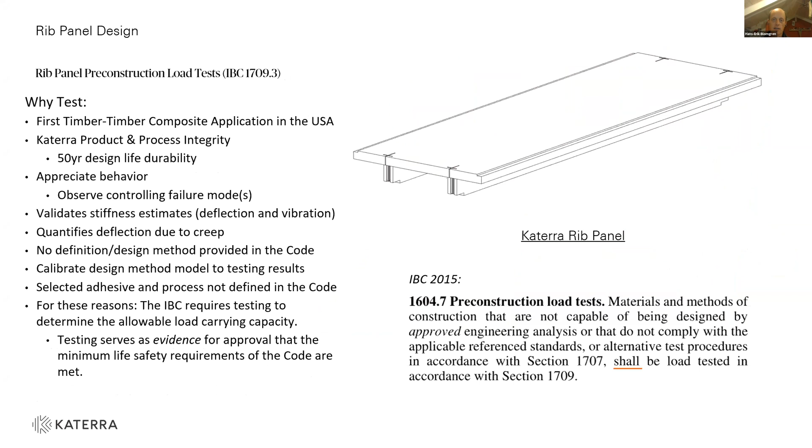Then we built a process in our factory and had to meet everybody at the manufacturing facility, to the construction crew that was here, making 300, 400 panels - many panels in about an 8-week period. They made all of them, which was cool. We had to develop this process of ribs, applying the glue.

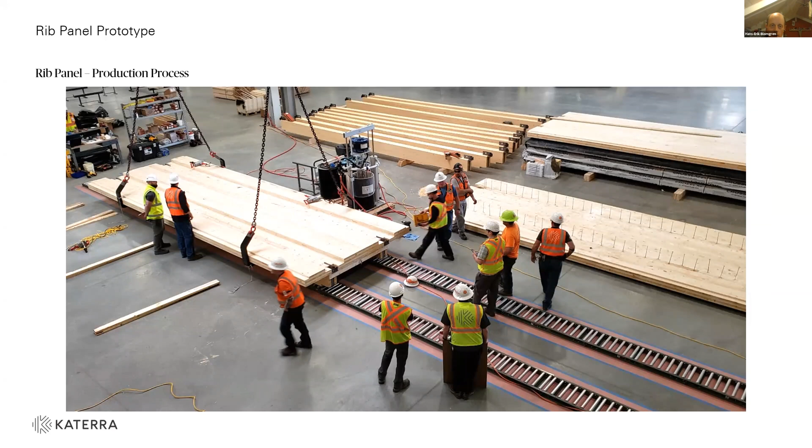Let's see what the next slide is - I might have put the image of the glue process here. And then we screw and glue it together.

So we get a big clamping force with these big screws that you can see in the top left, squishing the glue and getting that bond line durability.

I like to point out this is one picture of us putting it on kraft paper. We had to get the glue volume right and troubleshoot some of that, but it also was a quality assurance program. So we could roll up every morning, we'd measure our glue weight by rolling up the kraft paper on a scale and making sure we were on spec.

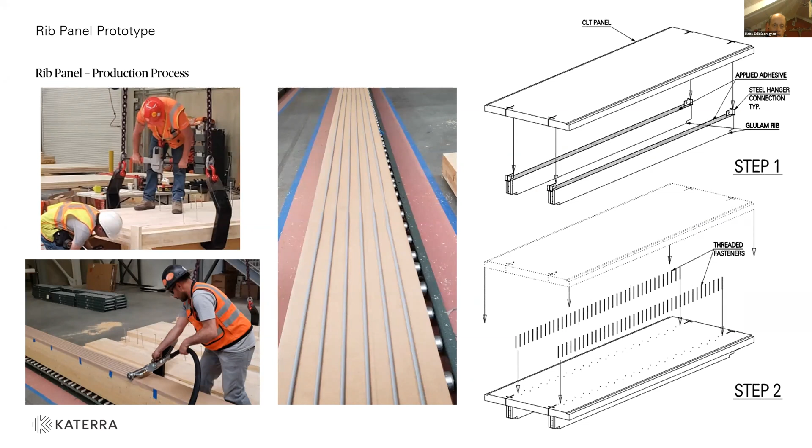Next slide. So then we packed up three of these prototypes we built and shipped them down to Oregon State University. Next slide. This is where we stepped through our mechanical testing, where we confirmed the strength and the stiffness of these panels, so an engineer could assign a design value to them.

And again, vibration was super key, so we could confirm to ourselves and in the engineer of record that this is a stiff enough panel for our calculation. So that was a key thing and super formative.

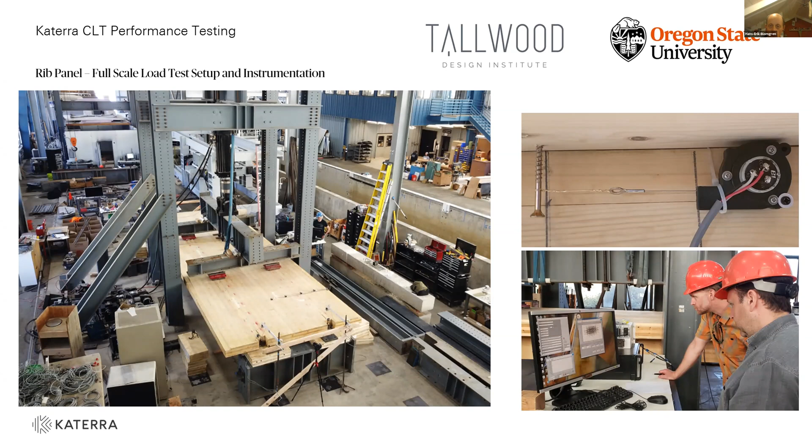We did this testing about four weeks before the first panels went up, so we were in an amazing place to deliver for Catalyst as a first project.

There's a picture of that deflection and the emphasis on the stiffness there. When you don't get composite action, each panel, CLT and rib, deflects independently, but once you glue and screw them together, you get this composite cross section, like a double T in concrete, sort of.

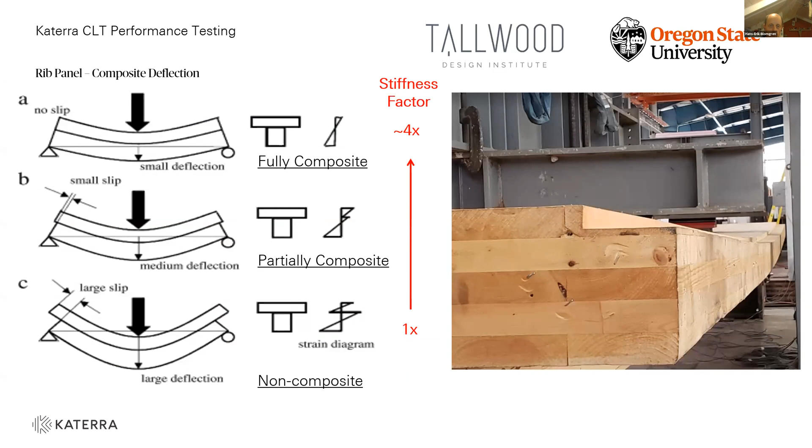Next slide. Oh, there it is, about a factor of four difference. All right, and then we break it, we look at how strong it is, and look at failure modes.

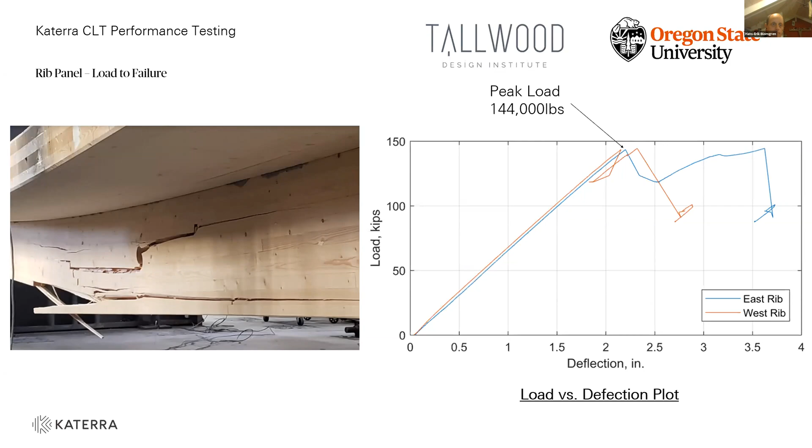This is all part of good engineering, and all done with the intent of doing this again on a project, not just making it work for Catalyst, but really looking at this as something we can build out as a product offering.

Next slide, then vibration testing. So the engineers modeled these floors with techniques and guidance that's out there in the market. So that set kind of where we had to be on the stiffness of the panel, and I won't go into the math there.

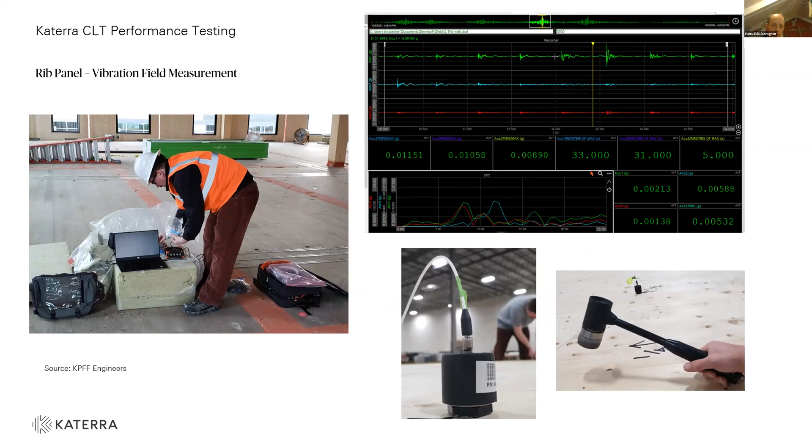Next slide gets into the field testing though. So we've gone back and actually measured this performance of how much the floor vibrates when people walk on it. Is it perceptible? Is it going to be onerous? And the results have been very positive.

And there's a little more to the story. What's next?

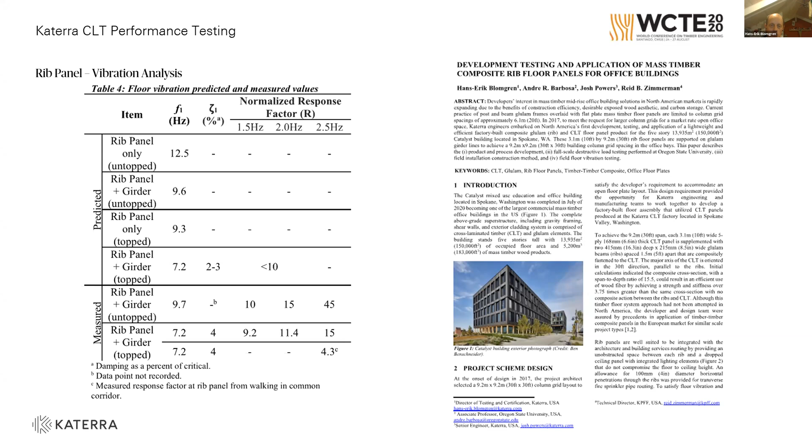Yeah, acoustically too, so there is a growing amount of data. When I started at Katerra four years ago, there was one Intertek test report for a framework project in Portland that never got built, and we used that for a very first project, not even this one.

But since then, Woodworks has brought a ton of guidance. Maxxon and USG have both come to the table with performance testing of their finishes on CLT, so we can now actually build in real performance criteria with confidence during design.

And Maxxon cares about performance too, so with our help they went back and field tested, because they know this data is gold to understand how it worked. We just got that report from them, and as we're reading through it, we met or exceeded the performance requirements specified by the consultant in the design.

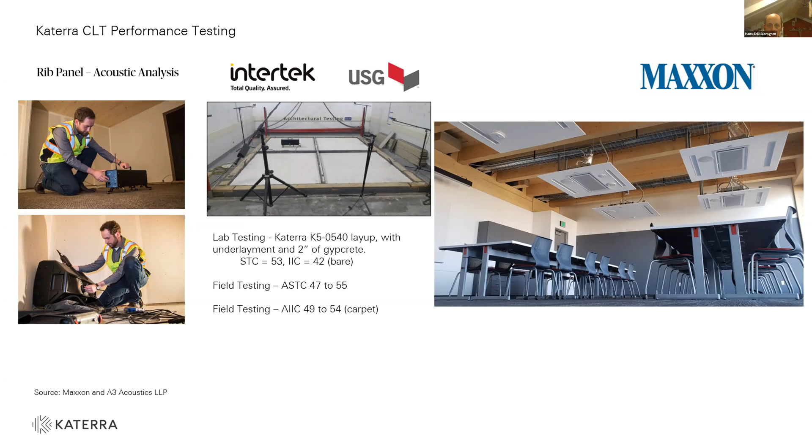Next slide is a handoff back to Sarah, I think.

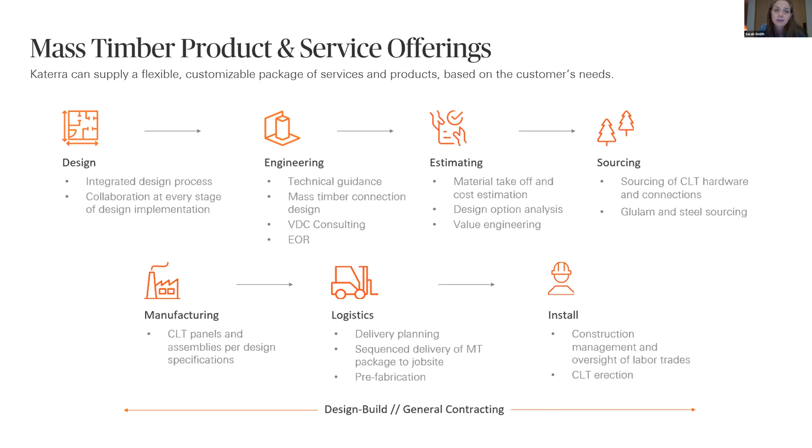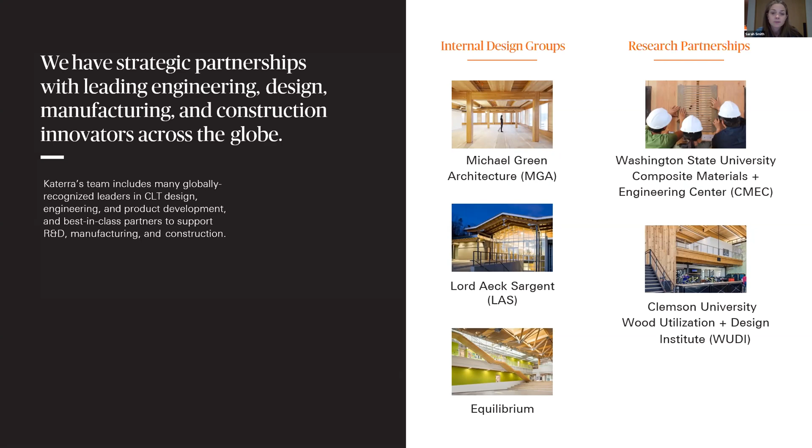Another quick snapshot - some of the firms I mentioned, MGA, who obviously played a big part on this project. Lord Aeck Sargent is a national architecture firm in-house at Katerra that we lean on, particularly on academic and multifamily projects, and then Equilibrium. Hans-Erik referred to some of our academic partnerships with WSU, Clemson, and a handful of others that we work with from a testing perspective. Also not mentioned here are partnerships with supplier partners, Simpson and Hilti, where we do product innovation and testing along with them.

We know that the sustainability values that Cora addressed on the building tour are only possible and achievable if we are sustainably sourcing our materials. We have 3 chain of custody certifications - FSC, PEFC, and SFI - which indicate the rigor we apply when identifying upstream suppliers that we're purchasing our lumber from. We also have a Declare label and are underway on our EPDs.

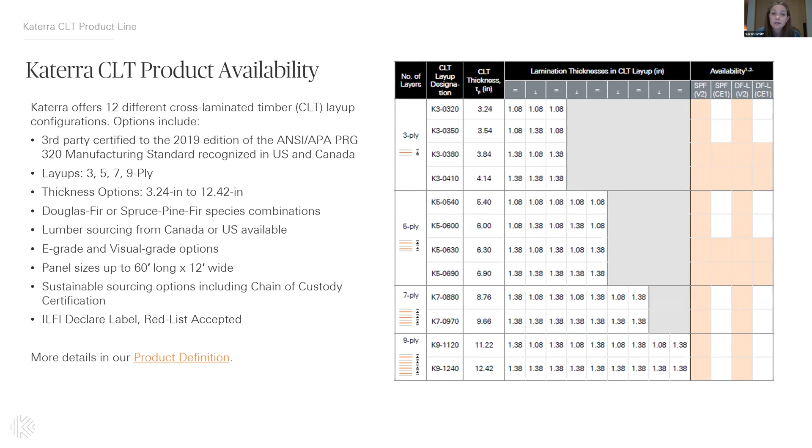Really the name of the game when designing in CLT is minimizing waste, so you want to optimize full usage of that panel. There is some flexibility in the size of the panels that we press.